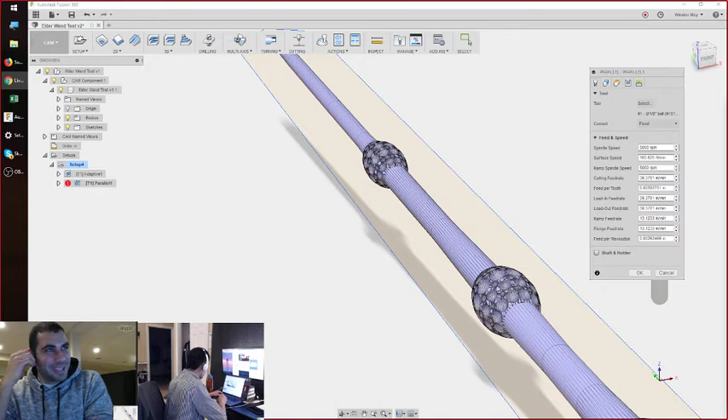I guess I should go into that and post that myself. Just let people know. Exactly. Let them know I'm not some rando. Maybe you can put a link. I don't know. We'll see. We'll have this ironed out by next time. We got 3 watching. For all those watching, just a second, we're informing everybody about our technical difficulties. We have first time live streaming technical difficulties. I don't know why. I had the stream key set up and everything. To be fair, YouTube is pretty new to live streaming too, so let's put some blame on YouTube here. I'm all for that. All right.

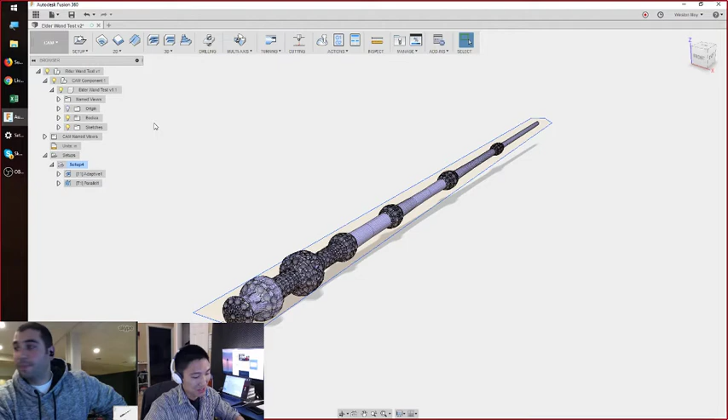So how about we go through some history of what brought this project on? Yeah, why don't you explain why we're doing this project? All right, so I don't know how many of you have been to Harry Potter World in Universal. They have these interactive windows where you can buy their Harry Potter wands, and you do a spell from the window, and some magic will happen in front of that window. Those wands cost, on average, $60 to $100. So instead, being makers, I talked to Winston here, and I'm making a video on how to make this wand in 3 different ways: 3D printing, I handmade one, and then I asked Winston if he could actually CNC one.

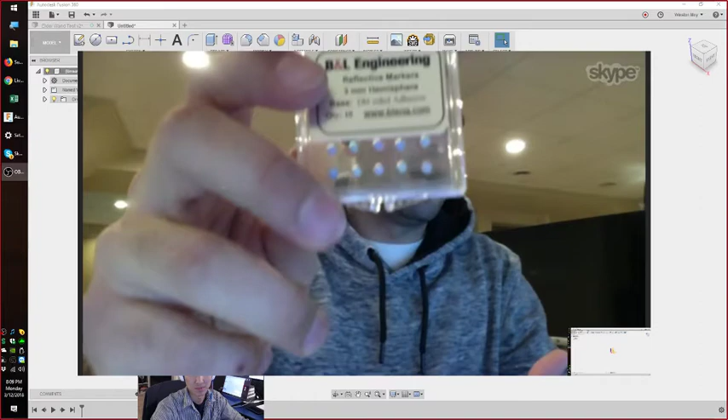So today he's going to go through how to actually use Fusion 360 to create the G-code for this wand, because it's more complicated than basic knowledge. And the interactive part, right? How do you actually make this happen? You probably won't be able to see from there, but in the windows of Harry Potter World are infrared sensors. It looks for some type of reflection from the wand. So I got these reflectors that stick to the top of the wand, and this will work exactly like those Harry Potter wands.

I'm going to stick it to the top. This was $30, but you get 10 of them. So now I can make 10 different wands for $30 compared to their $100. I'm heading out to Harry Potter World this Friday, and a week after that, I'll try to post a video to show you the results of all these efforts and how well it works. Did I cover everything there, Winston?

Yeah, and for those of you who don't follow William Osman, he made a hilarious video with the same principles where he stuck retroreflectors on trash and hot dogs and horrible things like that. Really good video. Literally reaching inside the trash, picks out a pickle. In the video, he actually steals a kid's wand to show that it works the exact same way. So basically, where I'm starting from is a Thingiverse model.

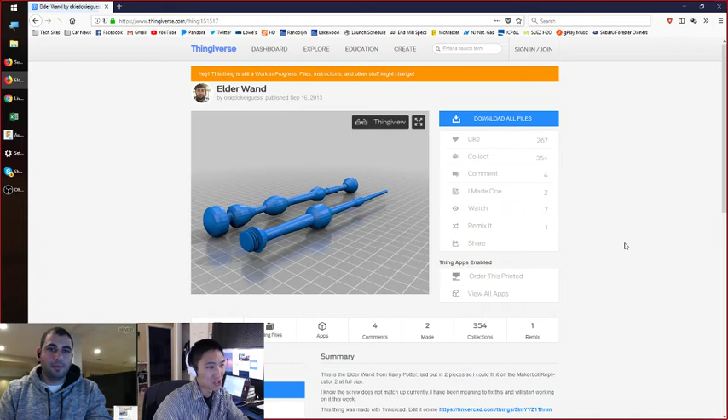Just your run-of-the-mill STL file. We're going with the Elder Wand, a single-piece model. Any one of these would be fine. Sometimes they're broken up into multiple segments, and you just have to stick them together before you machine it. So I have a file already downloaded.

So I'm going to go into my model workspace and hit Insert Mesh. I'm going to go with the single piece. This one comes split up into two, if you want to print them separately. But since we're going to machine it from a single piece of wood, we'll go with the single piece STL. I know for a fact that this file, once it loads, is in millimeters. So we'll change that setting, hit OK, and we have our model.

If you chose inches, would it automatically convert it for you? So let me show you in Meshcam. It shows you, I wish Fusion would show you by default, but the units in an STL are non-dimensionalized. So I have 28 units by 380 units by 28.1 units. And so if it's in inches, I have a wand that's a foot in diameter. If it's in millimeters, it's a little over an inch in diameter. So you need to know whether those dimensionless units should be inches or millimeters.

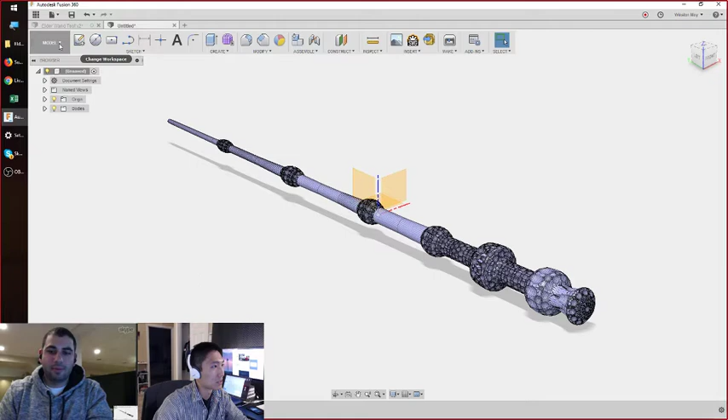In fact, I'll show that off now, where we can modify. By the way, the mesh workspace only shows up if you have a mesh on your screen, and you have to enable the mesh workspace. It's sort of a beta feature, but once you have that, you can go into Modify, Reduce, and I'm going to use Windows selection so I can highlight everything. Okay, cool. And then I can just drop the face count down to whatever I want it to be. Wow, that's a cool trick. Yeah. You could also do it based on density or tolerance.

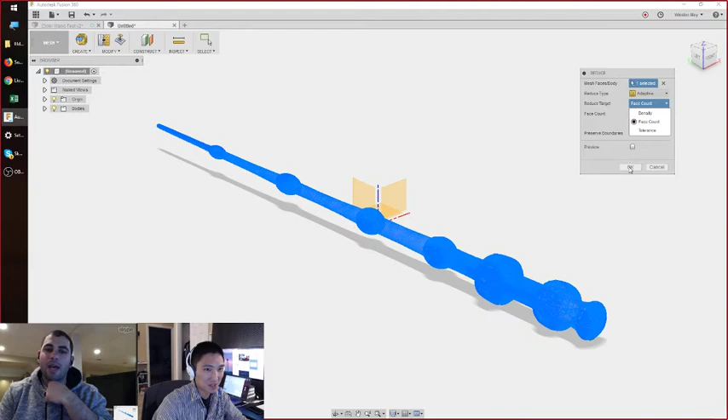The problem is if I do this, removing detail from the... It is. So I'm going to show you. Let me cancel that. You can see right now how this model sort of looks like a golf ball. Yeah, 100%. And if we wait about 30 seconds for this to actually run, if you do the reduction on this model, it's going to come out looking a little blotchier. Gotcha.

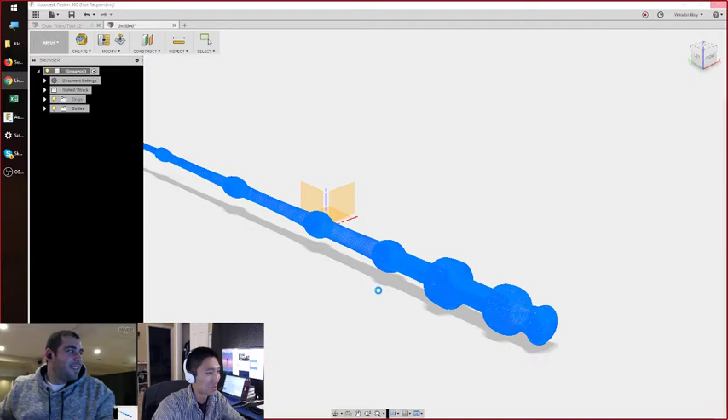All right, so unfortunately, I only have a Core i7, older generation. So that's what it looks like with a reduction down to 10,000 polygons. Not too bad, but you definitely lose detail. You're only going to be able to see so much with a CNC ball end mill coming at this, and it's going to look a little gnarled, a little more like actual wood instead of the specifically detailed features, all the divots and indentations.

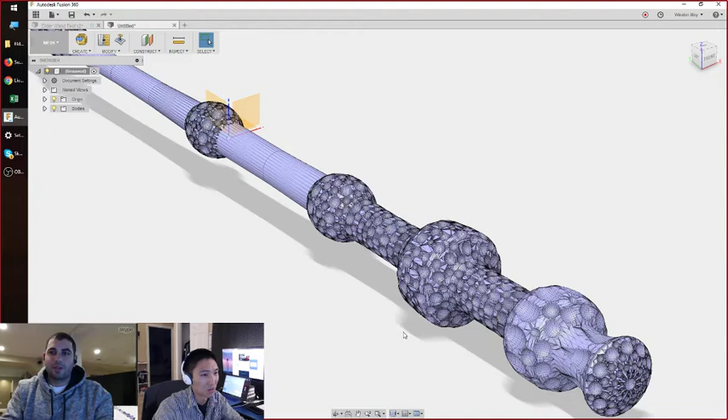So we're going to go back to the original model, undo mesh selection, and we have our little golf ball dimples back. So, can't do anything with the model workspace for now. We're going to go into the CAM workspace, and I'm going to...

Hey, you got a question here, Winston. Did you turn off the history feature before you imported? I did, but it's not strictly necessary because I'm not converting it to a boundary representation. So, if you wanted to make any changes to the mesh, you'd have to turn it off and convert it. But since I'm not doing any operations to this mesh at all, we can just leave it on and work with the raw mesh.

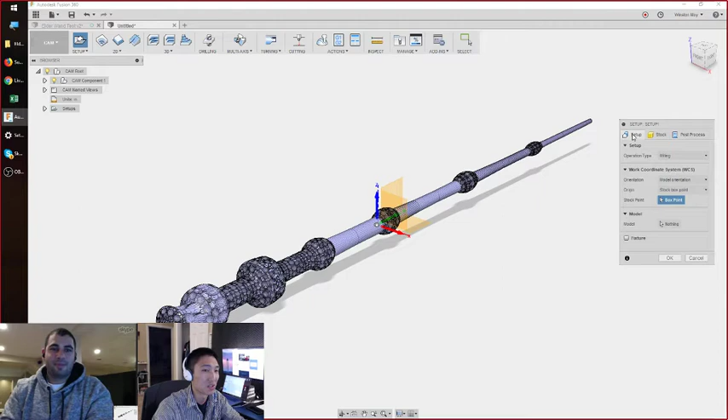So I'm going to create a setup, and looking at the stock, well, actually, in the setup we need to define what the model is. So you click model, you click your mesh, and now Fusion 360 is aware of the volume of this piece. So now when you go back to stock, it correctly shows it's 15 inches long, it's 1 point whatever inches in X and Z. Gotcha.

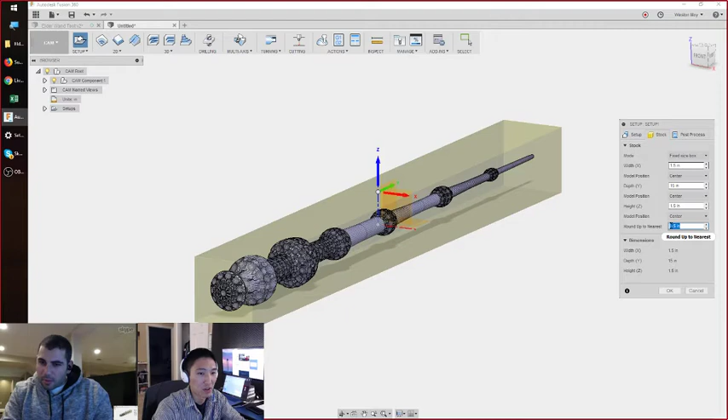Now, because we're machining this from real materials that we have to source, you're probably not going to have material that's exactly 1.14644 inches tall. So I'm actually going to use a fixed size stock box, rounded up to the nearest 0.5. And so now my bounding volume of my stock is 1.5 inches thick, 1.5 inches wide. You could machine this from like a 2x4. Yeah, for sure. So this makes it actually machinable.

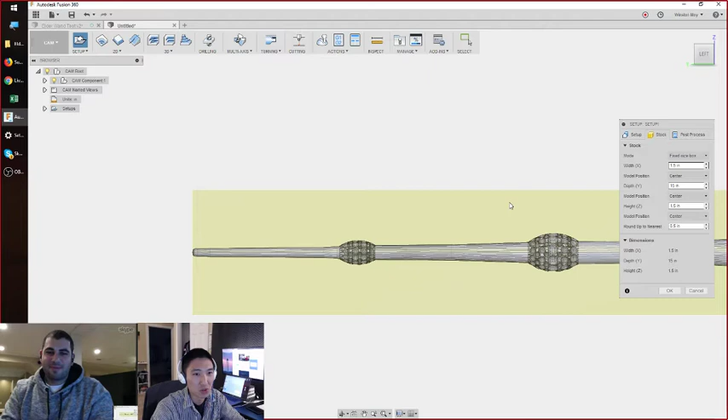And you would just plane it with the CNC, right? I'm assuming. Yeah. So you do a facing operation or an adaptive clear. I'm gonna just not do any of those operations, because facing down to an arbitrary height doesn't really help us much. If we do a face operation over on the right here, you'll bring the cutter down to the surface of the piece, but all the way on the other side, you still have so much more left to machine out. I'd rather just use one tool path. Yeah, makes complete sense. So I've got my stock. I'm actually going to put a little extra on X and Y, and I'll show you why in a minute.

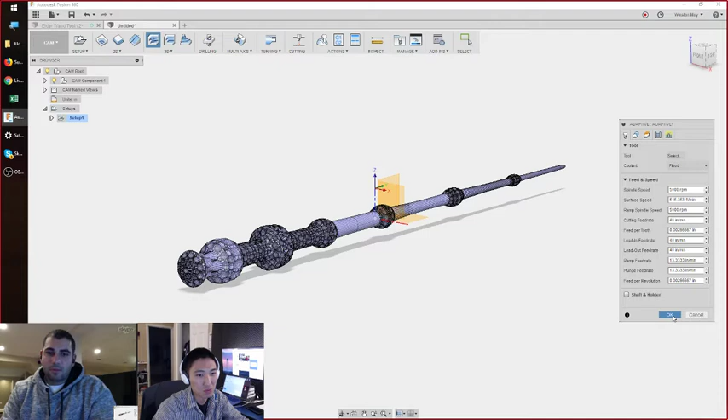So we've got our setup. We've got our mesh encapsulated in a stock volume, and I'm just going to start off with an adaptive clear. And because this is going to require two-sided machining, I'm not going to cut all the way through. What John Saunders of NYC CNC likes to do is just start off with the default settings and see what happens. And so that's what I'm going to run through now. And it's just going to show you how the toolpath is generated around the piece.

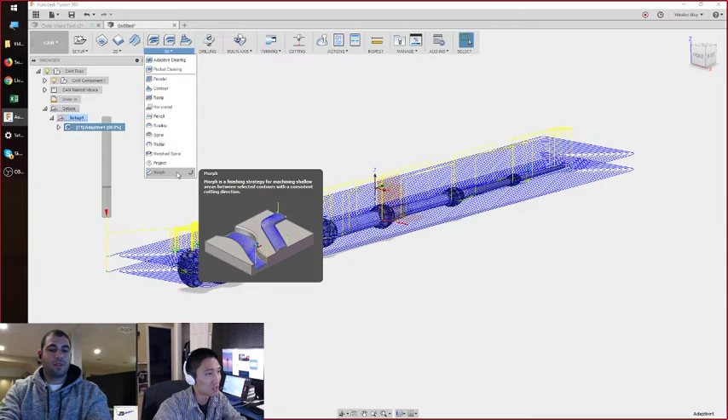So all of the 3D toolpaths in Fusion 360, they're what you would call model aware. So they'll automatically work around the volume of the piece you're trying to machine. That's why I can just hit adaptive, hit OK, and it knows to go around this piece. Wow. Look at that. So you'll notice with this, the adaptive goes all the way to the bottom. And if you're trying to machine this from both sides, you're not going to be able to hold this wand. You're actually going to need tabs, and without a contour operation, you can't really do that. So we're actually going to have to put in our own tabs in this model.

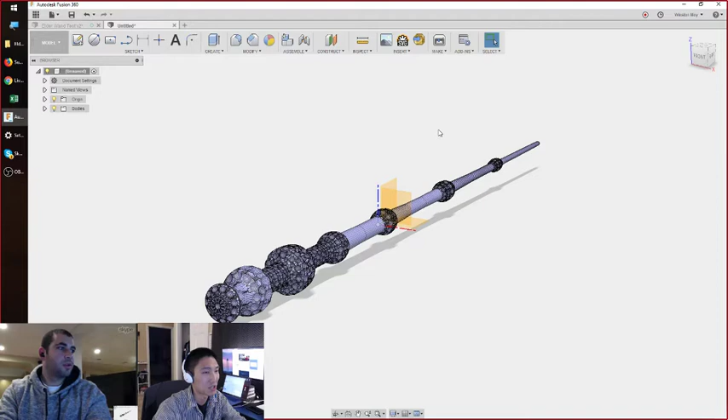Follow? Gotcha. So I'm actually going to go back into the model workspace. I'm going to pick a face that is parallel to the axis of the wand, and I'm going to start drawing some circles. So I'm going to put...

You got a whole bunch of people with Shapeoko 3s over here. Well, we got two. One of them has two of them, though. I'm jealous, Frank. He's got the legacy machines, he's got the Shapeoko 1, and now he has two Shapeoko 3s, and then Mad Drago got a Shapeoko 3. And you guys are doing it right.

So what I'm doing now is I'm just drawing a couple circles that I'm going to extrude into basically tabs.

Oh, that's interesting. Okay. And so you're going to have to sand these off. It's going to be a little more effort, but you have a lot more control over where this piece is supported. Yeah. So I'm going to stop that sketch. I am going to... Yeah, I'm moving up. I didn't even know that you could place your own tabs. I thought that was that automated one from before. So it's a nice feature.

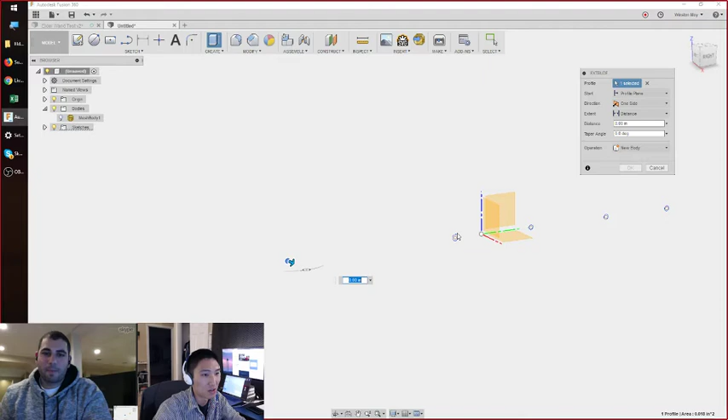So I'm going to extrude all of these that I just drew. And I'm going to do it symmetrically. So that means it's extruding from both sides. Distance, let's see what 1.5 inches looks like, and let's look at what that looks like with the wand. So that's how the wand will actually be supported. Gotcha. So we'll go back into our CAM workspace.

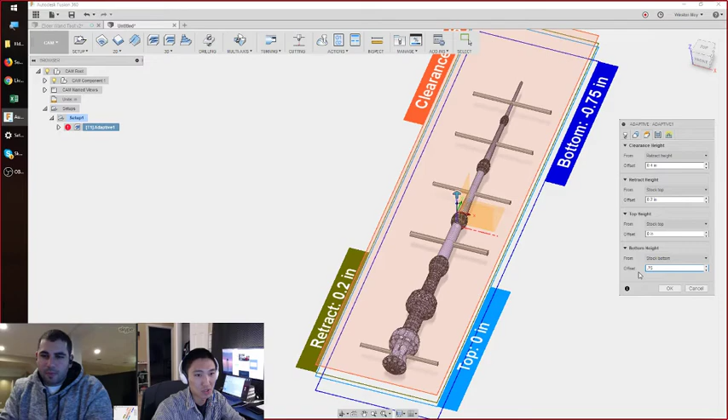So since we're going to flip this, we don't need to machine all the way through to the other side. We're going to come back with a second adaptive and do that then. So I'm actually going to change the height of this to only come up to 0.75 inches from the bottom, which, as you can see, is our midplane. Right at the midplane. Nice.

And of course you'd go and modify your feeds and speeds to get the right settings for cutting wood. Maybe do shallower step downs on your primary passes, just so that you're not putting as much stress on this, because this is going to be pretty thin. I was going to say at the tip of it, it's going to be pretty. Yeah. So the settings you'd want to change there are in the passes tab. Your maximum roughing step down. That's these two big steps here. First pass, second pass, where it's taking away most of the material.

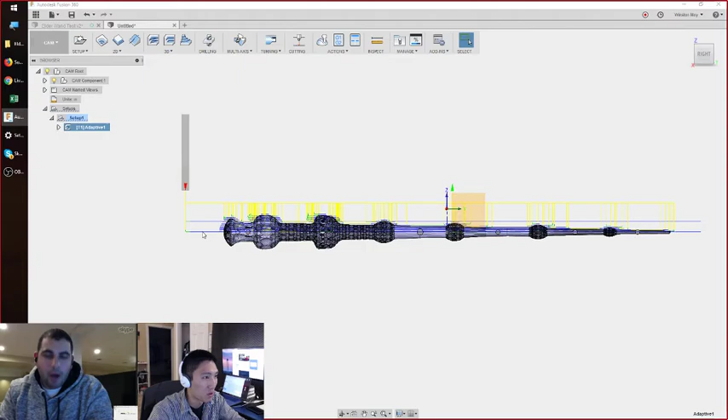Yes, you want to lessen that right at the tip. That is the first pass. These are the secondary passes, where it comes in and just refines. So we could do maximum roughing step down of, I don't know, let's say 0.07. Let's be gentle. The fine step down is usually 10% of it. I don't really care right now. We'll just do like 0.03.

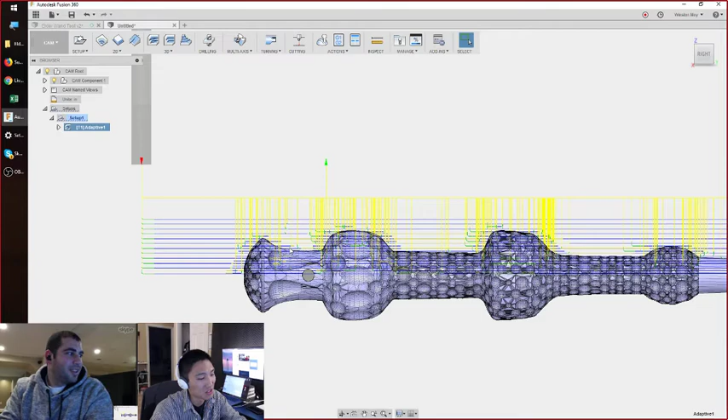And so now you should see that the major layers that this goes through are a little closer together, and it also takes longer to process, though. That's the downside. I was going to say, that's why it's thinking here. Yeah, when you're just looking to see whether or not it understands what the model is and if it's going in the right place, just stick with big chunky step downs and make sure it gets the broad strokes right, and then you can come in later and refine the model.

So, quick question: how long does your simulation time look like right now with all of that? Not great. Oh, it's not terrible. No, that is terrible. Is that hours or minutes? That's like 2 hours and change. Oh, so hours. Okay. That's a lot of roughing, and that's because my settings in the feeds and speeds are not set.

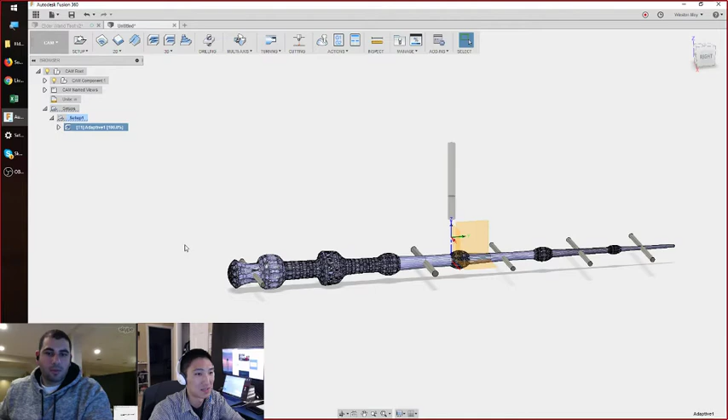Okay. So I would actually be cutting this probably at like 90 inches per minute. You could probably go faster. 40 lead in, 40 lead out. My ramping speeds, something like that. No flood coolant, and that should bring down the cutting time by like a factor of 3. Okay. And then also for a lot of these passes, I would probably be a little more aggressive.

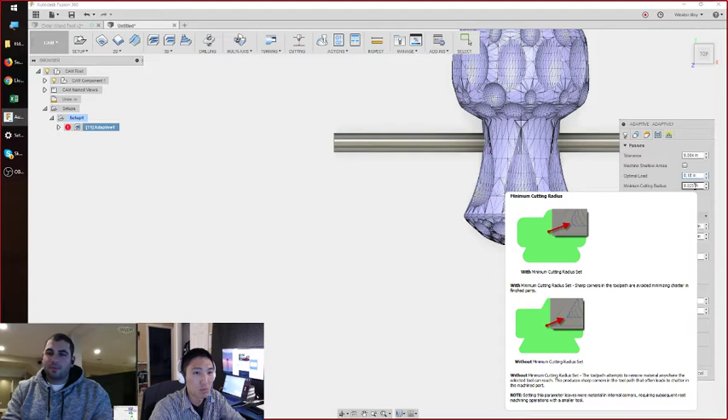Here, let me talk about tool engagement. So when this is coming through and it is cutting, it is cutting with about 40% of the diameter of the end mill. That is the radial engagement, which you can change. It's called optimal load. So I could bump that up to, say, maybe 0.18 inches, and it would use a larger portion of that diameter.

Yeah, it takes larger step overs. You can see there are a lot fewer lines here. Wow. Once this finishes calculating out, if you simulate it, you can definitely see it's taking a lot bigger bite. And so that helps reduce the machining time. So now we're down to under an hour. That's a nifty trick, Winston. I like that.

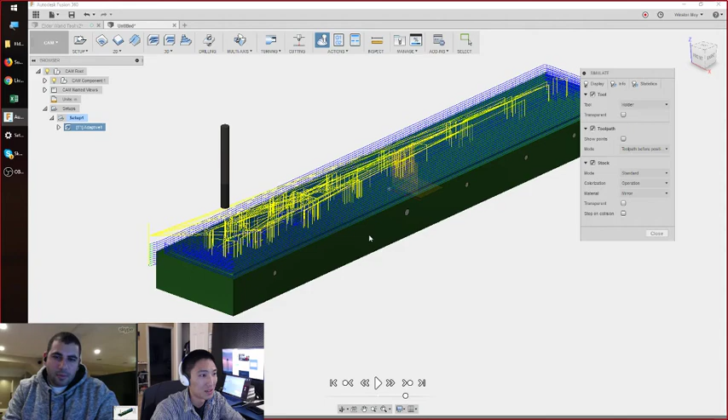So yeah, that is the roughing operation for the first side. And what that leaves you with is a really chunky mess. I'm going to hide the toolpaths. That's what it's going to look like after that first operation. Okay. So what you need to do is come back with a second end mill, a smaller one, a finer one, to sort of refine all these features.

Yeah, that makes sense. So we're going to do a parallel toolpath. I usually just throw this on everything. It's my lazy go-to toolpath. I'm going to change it to a 1/8 inch ball end mill. Okay.

Change all these feeds and speeds because it doesn't really matter, but I'm probably going to machine this tomorrow. Sounds like a plan. No flood coolant, right.

For my Harry Potter trip. How many of you guys have been out to Harry Potter World, if anybody? We'll see, so you can keep going. Oh, wait, you got a question here, yeah, Winston.

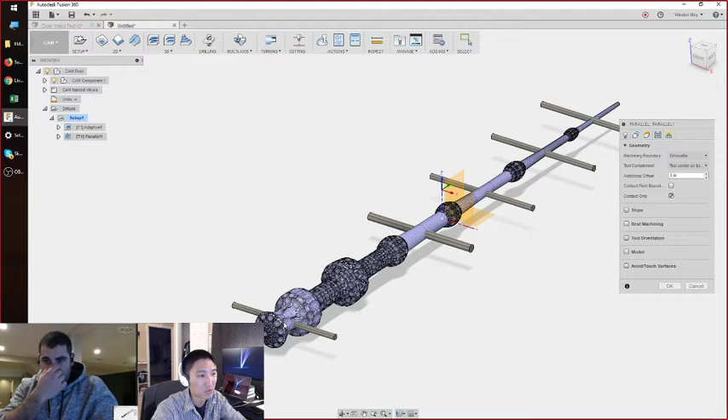Yeah, I see. When working with it. Oh, you got it? So it really depends. You can leave a lot more stock for purposes of stability. The more stock you leave, the stronger the part is. And it also depends on how you're coming at it for the second operation. So I'm coming at this with a parallel toolpath with a very small step over.

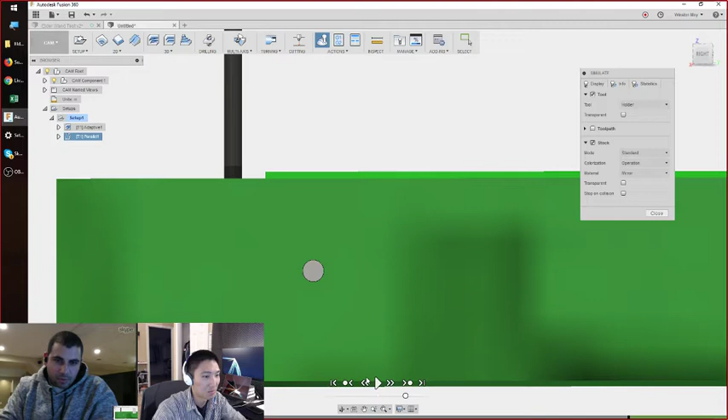And what that does for me is I'm going to simulate both of these toolpaths together. I'm going to go to the end of the adaptive and then just play it back from the parallel toolpath onward. So right now I have, I think it's 0.02 stock left. And as this end mill comes through, you can see, oops, oh boy. It's got to recalculate everything out.

The ball end mill isn't really engaging with all that much material. I can't dynamically scroll back and forth. I'm just going to slow this down. So 0.02 is perfectly fine for something like this, just because there's really not a lot there to touch. So as it shifts over 0.0125 inches, it's just nibbling away at what's left. So 0.02 is fine. You could leave more if you're worried about, say, the supports.

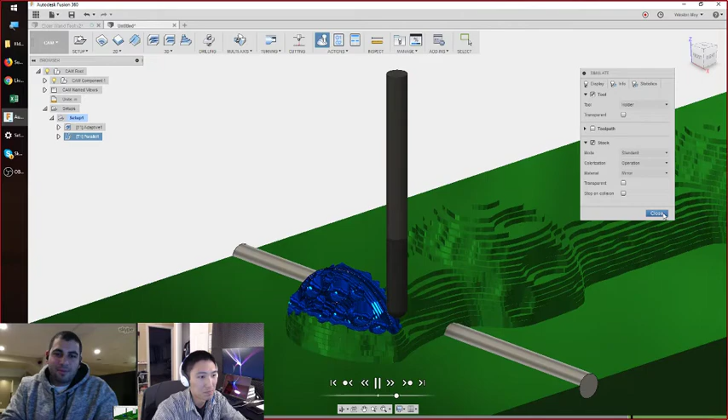Now, one thing I'm noticing here is that this parallel toolpath isn't quite touching all the sides. Why is that? I'm going to set the same settings for the height.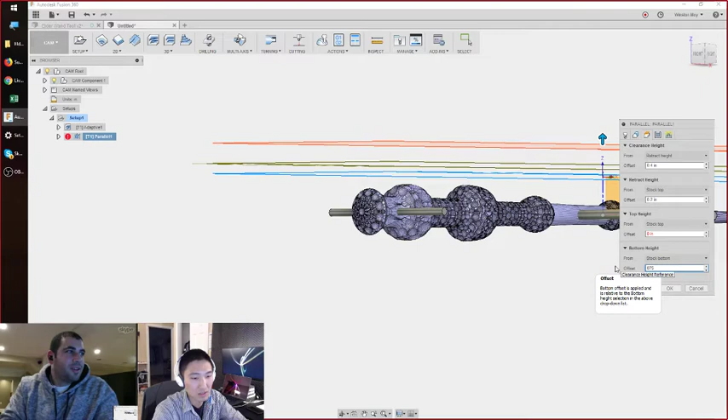Pretty cool, Mike. You're getting a Shapeoko 3 XXL. I do wish I had the room for that. That's pretty cool. I can't say I don't have the room. I got the Nomad, but I wish I had something with a little bit better tolerance.

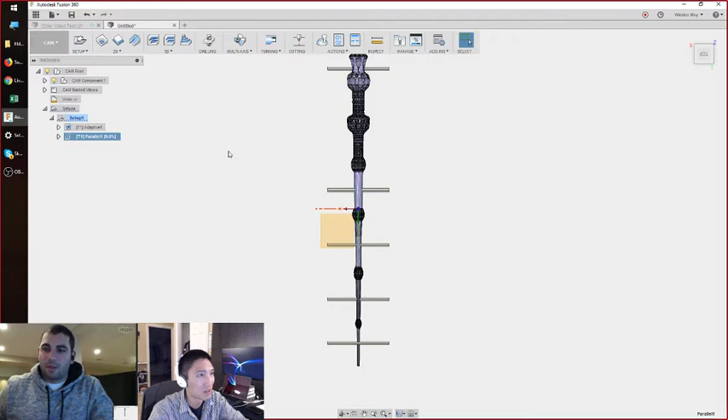Figure it out there. Yeah, so what I was doing before was I had the option for silhouette. So it looks at the silhouette of the piece, and it was putting the tool on that boundary. So when you look at where the tool is, it would never leave the silhouette of the piece. Okay. So if I show the toolpath, hide the stock, where's my tool? The center of that tool is always staying within the silhouette of that piece.

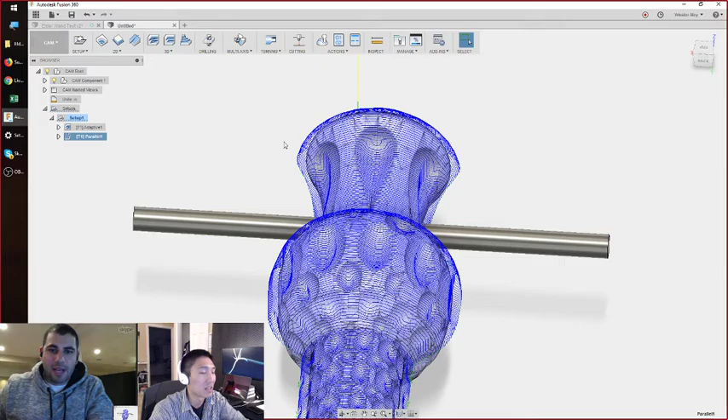So you're never going to get the edges like that? Yeah, because if it's stopping right here, it can't get around to the side. So you have to change the setting to allow it to just push outside just a little bit more. So when you do that, is it always going to be outside the boundary? It's just allowing the tool to push a little further, and that's why the toolpath extends past it. Okay, perfect. So you still get full coverage, but now the toolpath comes all the way down to our halfway point.

I'm surprised that's an option. You'd think you'd want that most of the time, but I guess it depends on whether you just want to keep it contained to the piece. Yeah, that's good. They give you complete controllability like that. I know, but that's also why it's so daunting for some people to pick up, because you got to make heads and tails of what everything does. Trust me, I'm gonna have to watch this video like 20 times to do it myself. It's pretty cool though. So we're looking at about an hour to cut the first half.

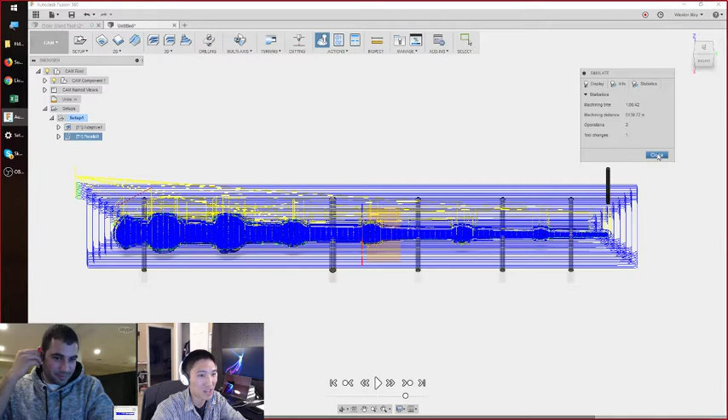All right. So let's create a setup for the flip side operation. I'm actually going to just duplicate our first setup. We'll call that, gotta capitalize the S, the right side up setup and the upside down setup. And in this setup, the only thing I really need to change is the model orientation. So I'm going to pick a z-axis and an x-axis. I'm going to pick the original ones. And I got to think about this.

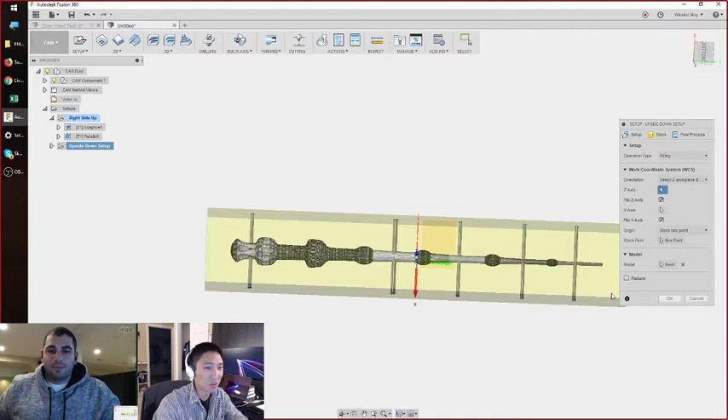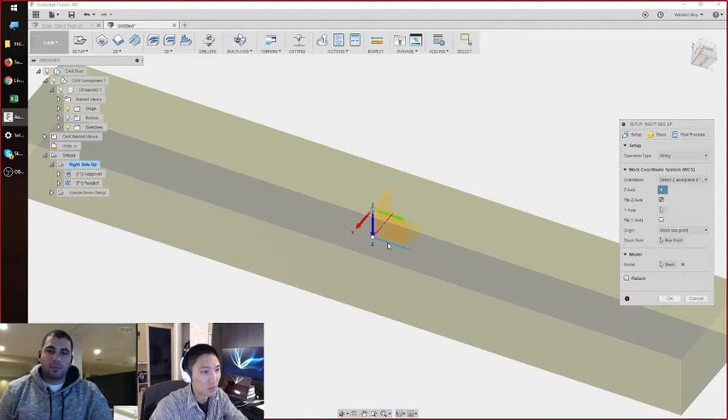So when you flip a part over, you got to make sure the orientations all match. That's what I was wondering, how you actually do that. So I actually have a convention because I have the Shapeoko XL, which is wider than it is deep, that my piece should always be pointed in the X direction. Yeah, makes sense. We're going to go right side up. Z-axis is proper up. The X-axis, let's see. Why am I picking Y? Whatever. Yeah, it works. Oh, nice.

My stock is... there you go. No, I've got to manually set this. Gotcha. 17, 3, and am I right side up? I am not right side up. There we go. So now X is pointed to the tip of the wand, and Z is straight up.

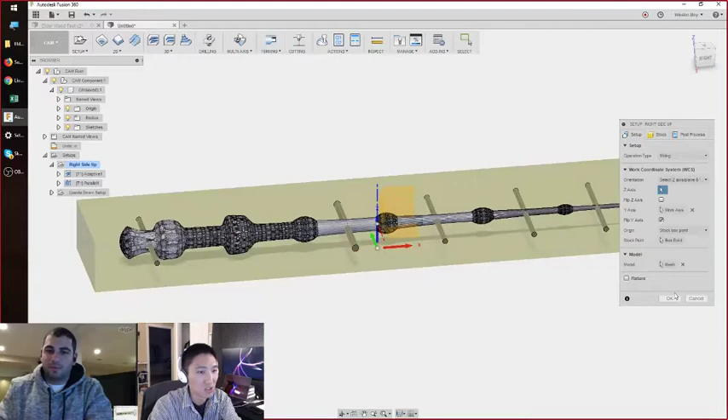And I'm also going to set the origin to the top. So when you come in and you probe for your Z height, that's where it'll go. I'm going to hide the origin again. So that's how I'm setting up my origin on this piece. X, because positive is specific for your machine, right? Yeah, positive X, always towards the tip. And that's the convention I'm going to keep just to keep things straight in my head. I'll regenerate that toolpath later.

So on the flip side, we are going to... Thanks a lot, Mike, for watching. Thanks for coming out. Yeah, thanks, Mike.

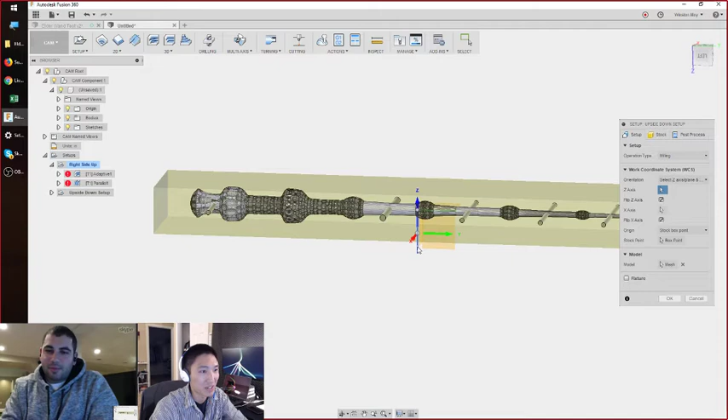Z-axis still is going to be... It's actually got it correct right now, but I'm just going to pick that Z-axis, pick the X-axis, and change my stock again. Yep. Oh, why did I say 8? Let's go with 3. And X is backwards, so I'm going to flip that. And on the flip side, we have X pointing towards the wand tip. Yep. So we're still keeping with that convention. And I actually need to set the origin to the top of the stock.

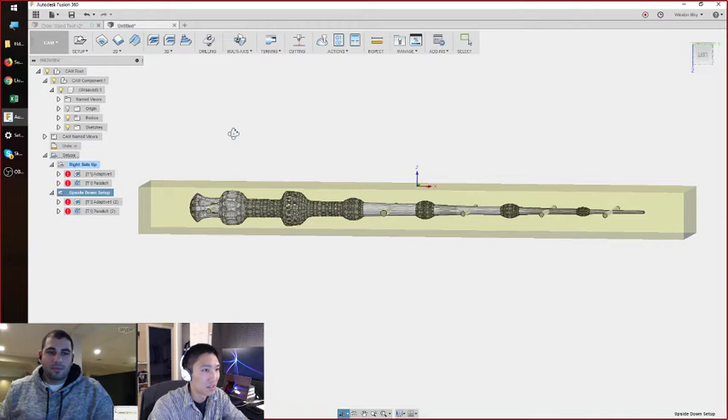So, upside down side looks like this. Right side up looks like that. Okay. So they're the exact mirrored opposite. I'm wondering if I regenerate these toolpaths, because everything about the cutting parameters is the same, and it just needs to know what part of the model it needs to work with. Yeah, it should just be a mirror opposite, right? So you can see that adaptive does the bottom side, and then this adaptive does that side. Oh, wow. Look at that.

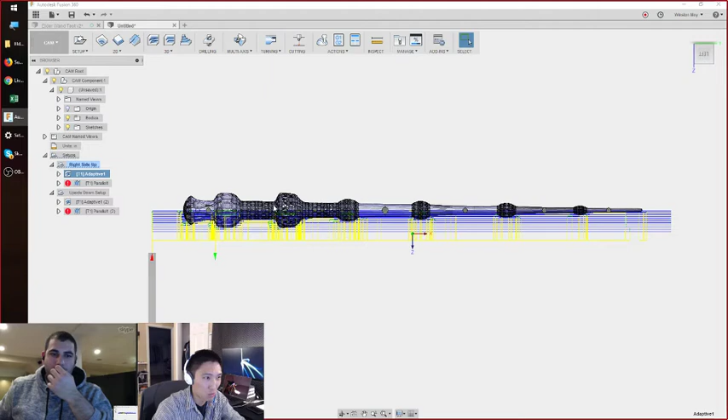So you can basically just use the same settings, same toolpaths on the same model. And just by changing the orientation of which side the tool is coming from, Fusion will know just how to cut it. And it's basically how I did the 5-axis stuff. You just change your setup to say, hey, the tool should come from this direction, and just let Fusion figure out where the tool should go. That's very impressive. And you actually said for the 5-axis, that was a one-shotter for you. You didn't have to redo it. You kind of nailed it on the first shot.

Let's not brag about that as much as I want to. Yeah, man, that's pretty impressive. Probably would have taken me a couple crashes. Yeah. This is why they don't send me 5-axis machines. I'm sure there are other reasons.

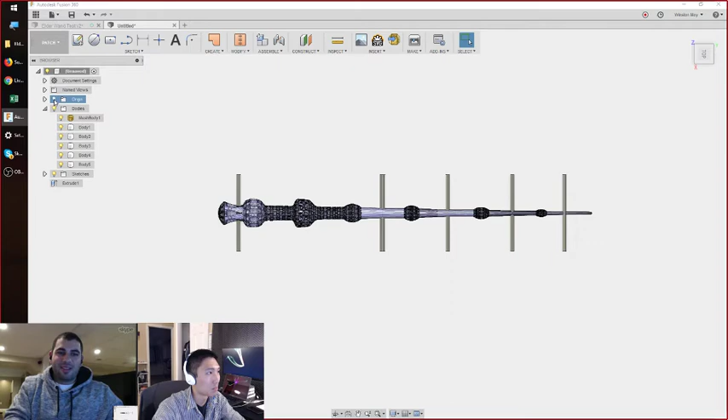So let me ask you a question at this point. When you actually lay out the wood in your machine, and you're flipping it over to do the other side, is there something you do personally to make sure you're aligning it correctly back to the machine? Doing two-sided machining without indexing pins is basically impossible. So what I like to do is when I lay down a piece of wood on my machine, I mill 2 holes on either side. In this case, I'm just going to draw an example of where these would be. I'm happy to hear that, because that's exactly how I thought you'd do it. So I got one thing right there.

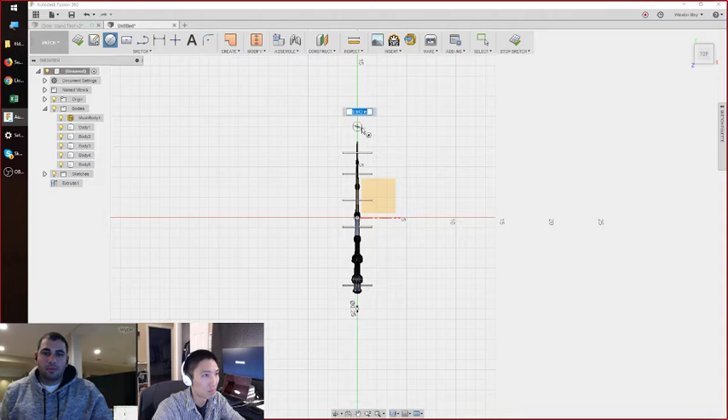Yeah. So I would want to put 2 holes about there and there. So just going back into the CAM workspace. And just drill that all the way through, right? Yeah, and I would use the machine to do it. And then on the table of the machine, I would do the same thing. What I do when I'm lazy, I'll just create a sketch with 2 holes of whatever distance apart.

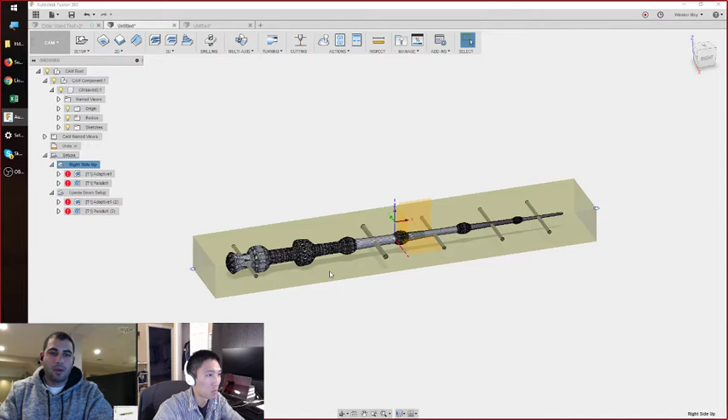And then just make a drilling operation based on that. It's just like 2D pocket. Actually, I gotta create a setup. But I use the same toolpath to drill these 2 holes in my wasteboard as I do on the stock for this before I start machining anything else. And you just put the pins in there, hold them in place, and that way they're in the exact same spot. That's cool.

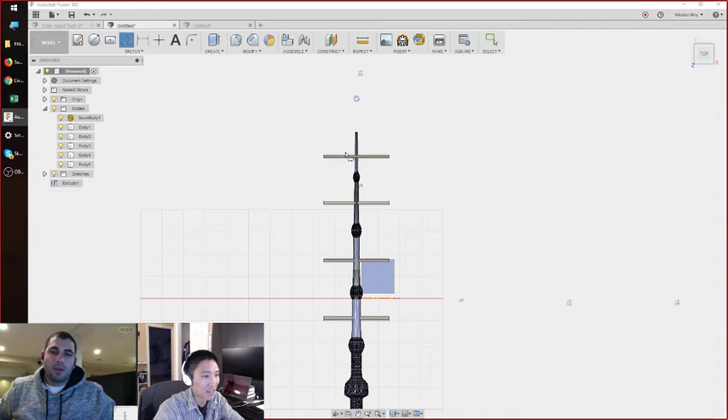Pretty cool. So there's one more little wrinkle about this toolpath that doesn't quite work: right now we're cutting away a ton of material that we don't need to. So ideally, you'd just follow a contour around this piece and cut only that. But since we didn't convert this to a boundary representation, I can't just go into my model workspace and pick that outside contour and offset it about 1/4 inch. So I'm going to have to draw my own little containment boundary around this piece.

So I'm going to sketch on this plane. That way you can tell the outline of the wand. So I'm going to say the tolerance test. All right, so I just need to make sure I have at least 1/4 inch of clearance between my part and my wall. So that's about good enough. Okay. So you don't have to mind your tabs then? Correct. I'll show you what it looks like. Cool.

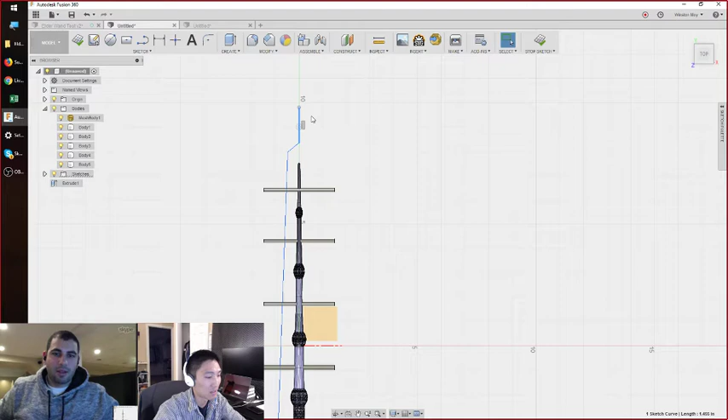I'm going to draw a quick little line here as my mirror axis. Select just that line, hit X, or right click, go to normal or construction, and it turns into a dotted line, so that doesn't count. But for everything else, I just double click to select that contour. I will go to sketch, I will go to mirror. My mirror line is that little axis I've made. And we have a closed contour. Fantastic.

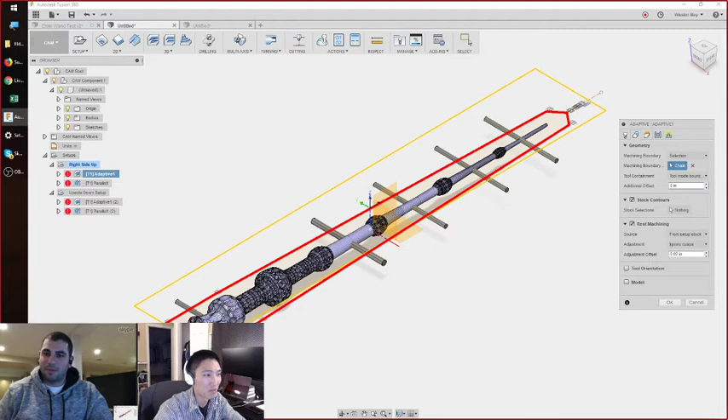So now when I jump back into the CAM workspace and I pick this adaptive, what I can say is, with the machining boundary, pick selection, pick that contour, and I'm going to keep that tool inside that boundary. This might work, this might not. Depends on whether or not I left enough margin at the end. But we're just going to find out. Let's see what it cuts. Yeah, let's see how this looks.

All right, staying in the lines, but it's getting all the way around it, and it got the end. Perfect. That's fantastic. So the amount that this is machining, wow, look at this. A lot less. Yeah, that's a good move. Gets to the bottom, and let's look at what the machining time is for this. Total machining time, 37 minutes. That's not bad at all. So we saved like 20 minutes by machining away less material.

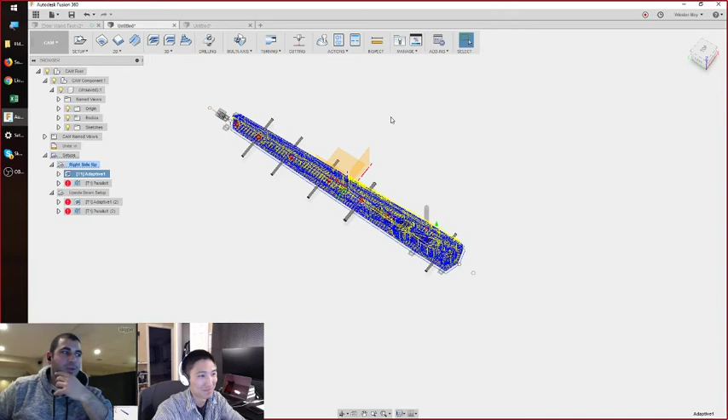I really wish I did that when I did the tolerance test for the nozzle, because I was milling out everything in a large square around it. It was so wasteful. Yeah, mistakes were made. Yeah, more than one.

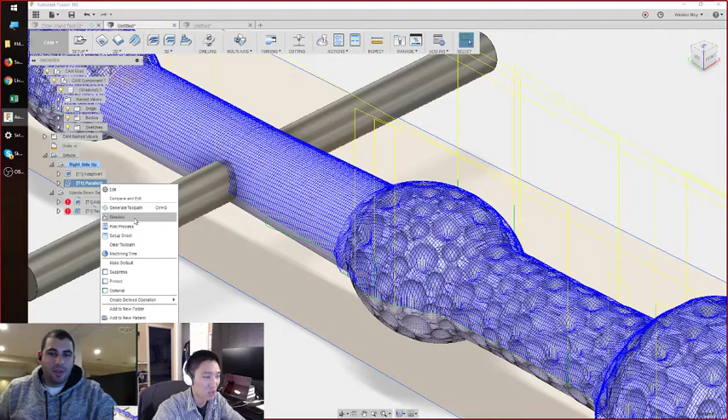So what I sometimes do with a parallel toolpath is, just because of the way the end mill is going to come over this, it's going to leave sort of concentric rings all the way down. I'll come back with a perpendicular pass, so the toolpath looks like it's hopping over this in a ring-like fashion, then axially. So it comes forward and backwards. It's probably not the perfect toolpath for this, but when you want to be thorough with your coverage, like you want this end mill to touch every part of this, it works pretty well. Yeah, that looks fantastic, man.

Hey, you think we're gonna get some snow tomorrow or what? I hope so. Central, eastern area. The latest forecast only said it would be like an inch. I'm seeing 3 inches, man. You're checking around 4. Well, actually, you're closer to the shore. So. Yeah, I get a good amount normally.

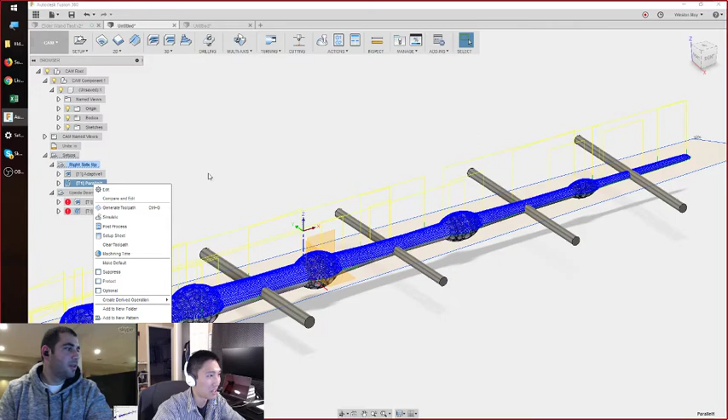Yeah. So this is the perpendicular pass, and just by doing all of that, you can get a pretty good surface finish. So that's with a ball end mill. This is with a 1/4 inch end mill. And so what I'd probably do to machine these, I would post these separately. Okay. Like 2 different files, do one then the other? Yeah, because I got to do a tool change.

And unless you have something with a tool changer or an automatic tool probe, you got to just stop the machine, change out the tool, then restart it. So I would actually probably post these as a separate file.

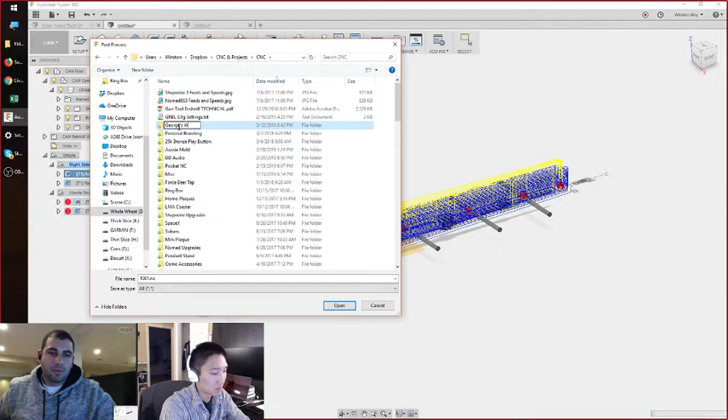And naming is also a big thing. You've got to make sure, be methodical. So this is side A, 1/4 inch operation. Gotcha.

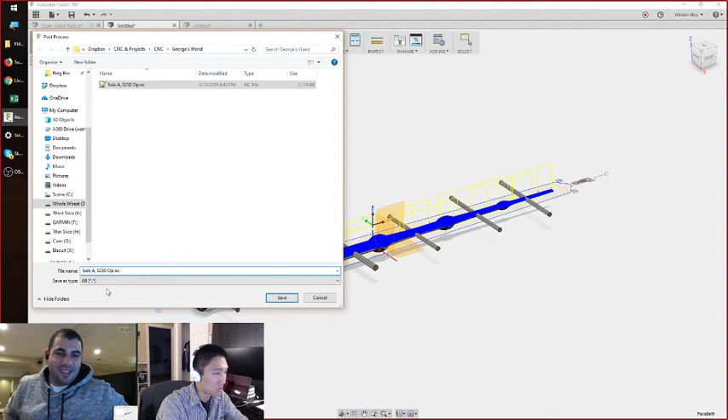And so this is still side A. This is our 0.0250 thou operation. And basically just do the same thing. This will be side B. Okay. This side we need to set the containment boundary as before, but that's basically all there is to it.

Yeah, that's fantastic. The spacing of some of these tabs you have to play around with. Like the tip of the wand might be just a little too fragile. It's not a lot of material there. And even the tabs for that might be kind of hard to machine. Yeah, I mean, you're gonna have to come at this.

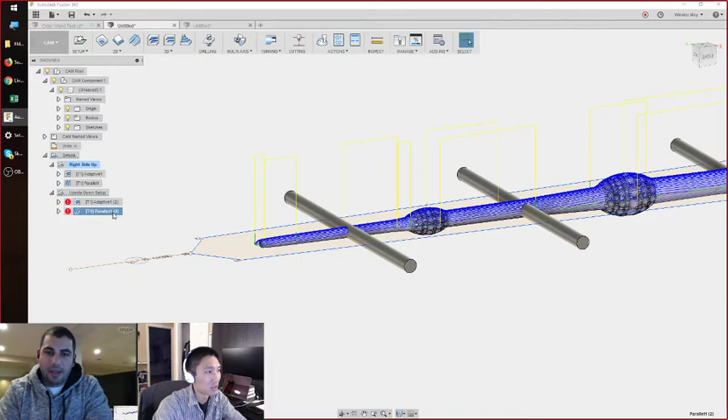You're gonna have to come at it with a Dremel and just use a little cutoff wheel. Like take these off. A filer at the end of it all. Yeah, and then just sand that down. Yeah. And so that's actually a reason why you might want to leave less stock, so that the parallel toolpath just has less work to do. But it's a fine balance you've got to figure out for yourself.

Oh, that's interesting. Looks like the parallel toolpath doesn't respect the tabs that we have. So let's see it going through it, huh? Generate that toolpath. So these are the things. This is why you look at your toolpath like 15 times before you actually run it, because I've missed things like this before. And so geometry, model surfaces. It should definitely pay attention to the wand, but it should also pay attention to our tabs.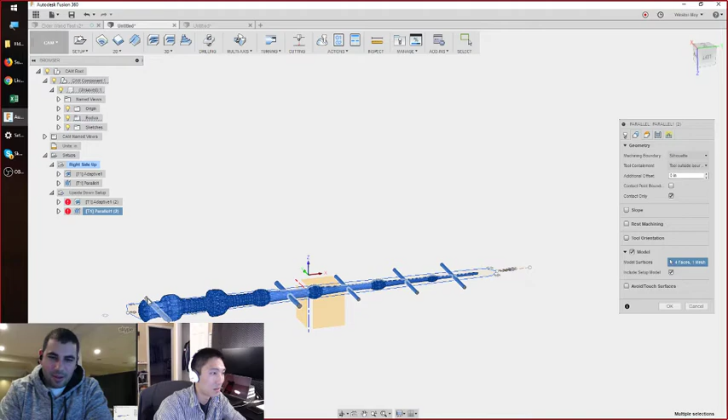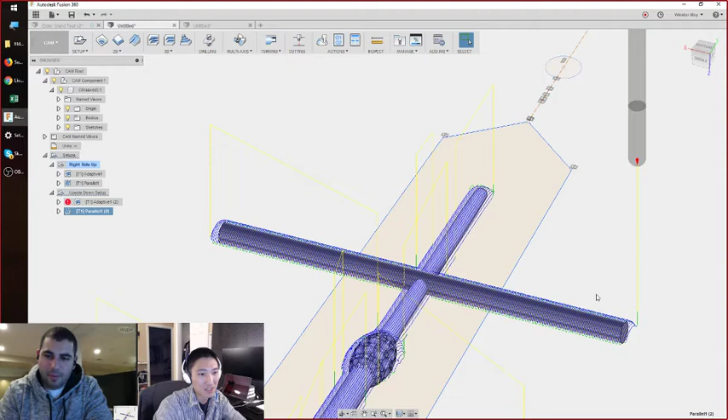Okay. And so now, when it goes to the toolpath, fingers crossed, it will go around the tabs. It's actually machining the tabs too, like all the way out, which we don't really want it to do, because the adaptive hasn't actually cleared that area. So if it's coming in this area over here, it's actually just going to be ramming straight into uncut wood. Yeah. So we want this toolpath to actually respect the same containment boundary we had before. So tool inside boundary. Nice. That makes complete sense.

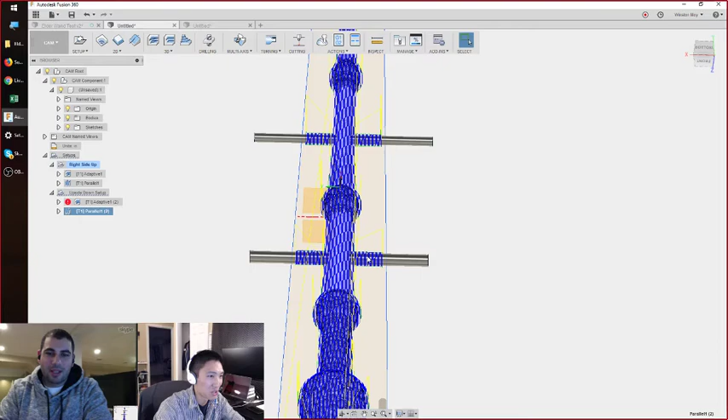It's still going to machine the tabs, but that's fine. It's like a couple extra seconds of time. So now that's what it should actually be. That looks pretty good. Yeah, I see the little subtle difference. So there's still a lot more you can do to optimize it. Like I could make a tighter containment boundary so that you're touching less of the tabs. But for the most part, that's all there is to it. So I'm going to run this tomorrow.

You're so good at explaining this that I actually feel like I could try to do this myself, which is saying a lot. You should try it though, because all of these options that are in here, you only really figure out through trial and error. Like the feeds and speeds, that's self-explanatory. But once you start getting into all these options like slope, like rest machining, only by just trying around, poking with the settings, are you really gonna get a feel for what they're used for.

Like slope here, I could say I don't want you to machine the really steep parts, so stop at 75 degrees. And when I come through here again, it's going to probably avoid some of these walls over on this side. Let's see what it actually does.

There's some places like right here in the middle, right there, that it's avoiding. It's not coming all the way down and hitting it from the side. It's probably not the most dramatic example I could have come up with, but no, you could tell for sure, especially in the middle of some of the details there, skipping out. Yeah. So I'm probably going to run this tomorrow after work, and I will let you know how it comes out.

Thanks. Thanks a lot, Winston. It's going to be pretty fun to bring out there and test this out with everything else, obviously. And actually, if the tip just breaks off a little, you're actually going to have to cut it off anyway to stick on your retroreflector. So it shouldn't be a problem. Yeah, I don't think that'll be a huge problem.

I need to stick these guys onto there somehow. Well, this actually comes with double-sided adhesive, so that shouldn't be too big a problem. I wouldn't trust that adhesive. I just use a little bit of super glue. I was going to put some super glue. Yeah, I'm going to use super glue with that, just for backup. You can't trust it.

Michelle's still questioning me actually making this happen, so I got to make sure it happens. I can't lose that battle. You can't let her down, or you can't let her be right. That's more important. Can't let her be right. I think is the right.

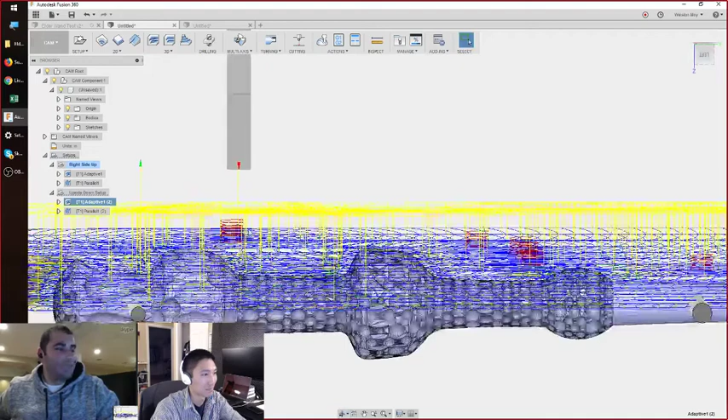One other thing I like to do just before we sign off is, so you could see that this toolpath has a helical ramp into the material, so it comes down in a spiral, so it's not just plunging straight into the material, but it's actually pretty slow. When you're cutting aluminum, that's really helpful. Wood, not so much. So what I like to do is you can either take it out completely and just go with a plunge operation, or what I do is just make a more aggressive helix.

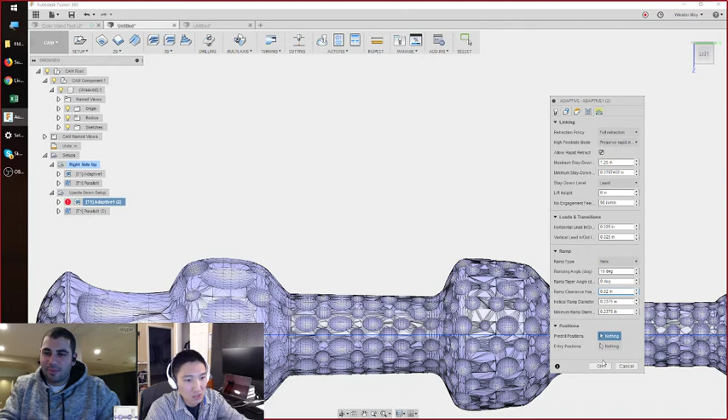So that's pretty, 10 degree, and I start it from the top surface of the material just a little bit closer, so maybe 0.02 inches. Okay. So it starts much closer to the surface. Yeah, look at that. Oh, that's cool. It takes out a couple seconds for each plunge, which helps out a lot in the long run. That's pretty fantastic. Hey, you got a question out here.

Yeah. From France. So MeshCAM is good because it doesn't give you a ton of options. You click roughing pass, you click finishing pass, and that's basically all there is to it. You can do waterline finishing, you can do parallel finishing. I'll pull it up for people who haven't looked too closely at the interface before.

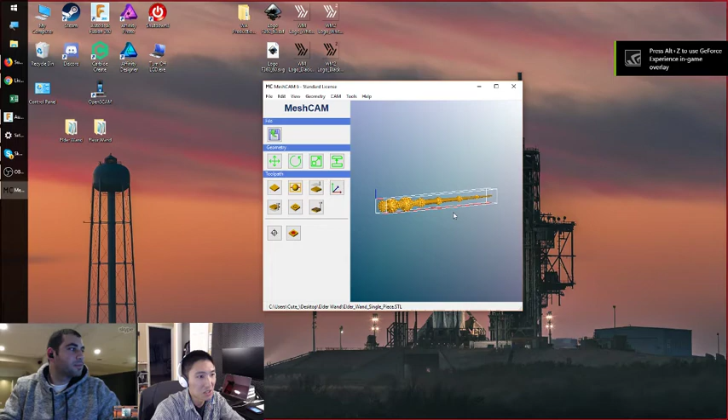And so, let's see, is my orientation correct? Z is up. You can define your stock to be fitted to the geometry, close enough. Any supports you might want. It's a little slow just because of the size, the number of polygons.

You can set your retract height, your program 0, and when you generate a toolpath, these are your options. Roughing, yes or no, and then finishing, parallel, waterline, and just a little pencil trace around. And that makes it really straightforward and easy to use. The problem... Less controllability, huh? Yeah, so

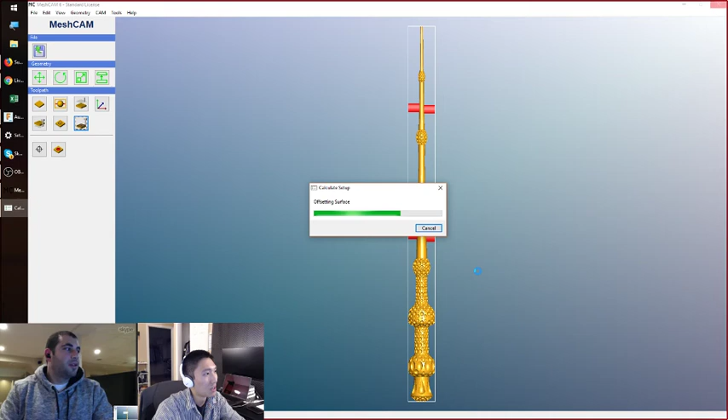when you're doing wood, that's fine. These toolpaths are very basic and straightforward. It doesn't do any of the ramping or adaptive clearing. In wood, that's fine. But when you're starting to do metals and you need more control over how the tool enters the material, then you start to run into limitations. And I'm going to do a video in the future about why adaptive clearing is awesome. But it comes down to the fact that, remember our radial depth of cut?

How we could say we only want the tool to engage a certain fraction of its diameter. You can't really set that as well in other programs that don't have adaptive toolpaths. Because what happens when this cutter runs into a corner, it rams straight into the corner, and all of a sudden you have a much larger circumference of that tool being engaged by the material.

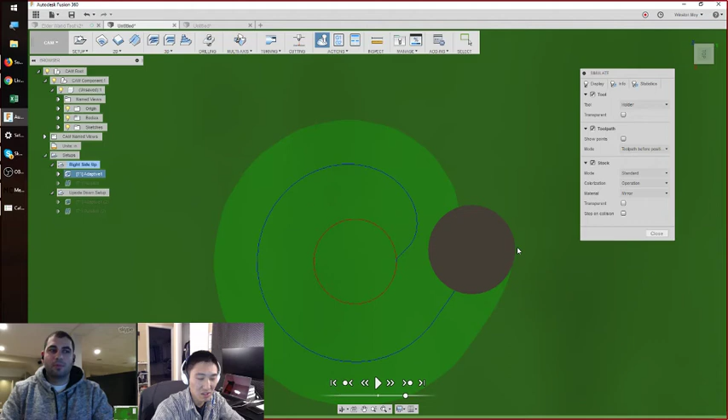It changes the stress on the cutter. If your machine isn't rock solid like a Haas or a Tormach, it can cause deflection. It can cause chatter, and so that's why being able to control just how much bite your tool has gets important with higher level machining. But for MeshCAM, wood, plastic, it's fine. But it's just having that amount of control over your toolpath that makes it much more valuable for complex stuff.

Does that answer your question? And look at, did it add the tabs there itself, or did you do that, those red tabs? So I added those tabs. Okay, I missed it. The other problem with MeshCAM is that you don't have real-time feedback into the generation of the toolpath, so I don't know if it's frozen or it's going to pop out with the toolpath in the next 5 seconds. Yeah, it's not responding.

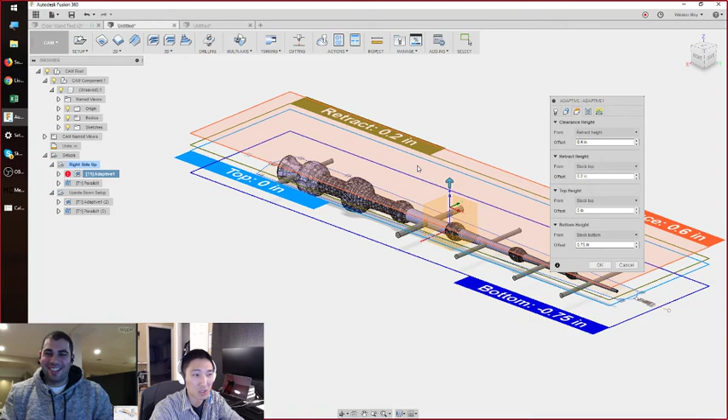What is the purpose of the ramp plunge clearance when cutting into metal? Default value is really high. So what he's talking about is these heights for your retract height, your top height, feed height. It depends on whether or not you have clamps you need to avoid, usually, but I will just set these a lot closer, just so that my tool has less distance to travel.

So you can see the yellow toolpaths. That is when it's just plunging straight up and straight down. Depending on what kind of toolpaths you have, there may be a lot of them, and so by just shortening that retract height, you can save a couple seconds here and there. But unless you have any conflicts or your material's uneven, you can be pretty aggressive with reducing that height.

I will say that for some material that I've cut, if the wood is a little warped or wavy and you have a pretty fragile end mill, I've seen bowing of up to a 1/16 of an inch, and if you don't retract past that, you could just scrape your end mill against the top of your material or just crash it. So as long as you're comfortable with the amount of clearance you have, you can shorten up that retract height.

Yeah, that's fair. I noticed with the Maslow that I really wanted to reduce the retract height by a lot. Yeah, so going to the Maslow, you don't have clamps, so you don't have anything on the top surface of your material, and also your sled helps you account for any sort of unevenness in your material. Exactly. So in some ways, with the Maslow, there's less to think about.

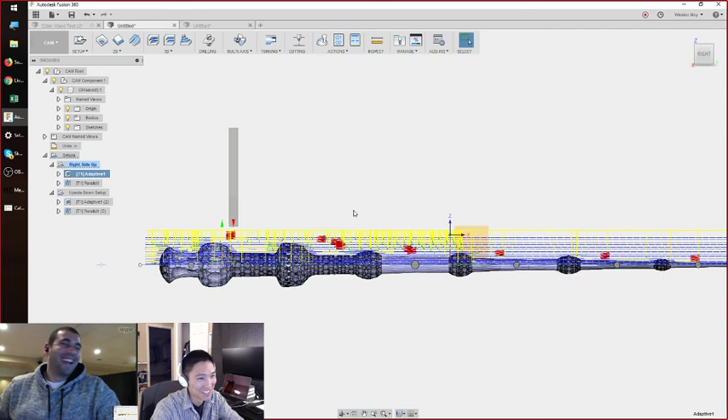Are you about to compliment the Maslow here, Winston? Is this coming? I was going to say it's like having training wheels on. There you go. Take it how you will. I'll take it as a compliment. All right. Maslow, we're going to make great things. You'll see. I gotta come over and take a look at that machine. You definitely do. Maybe when I upgrade the design, that'll be better. Okay. Get the configuration to the latest and greatest, and I'll come over and maybe we'll make that Adirondack chair project of yours. Yeah, that's a good idea. Let's do that.